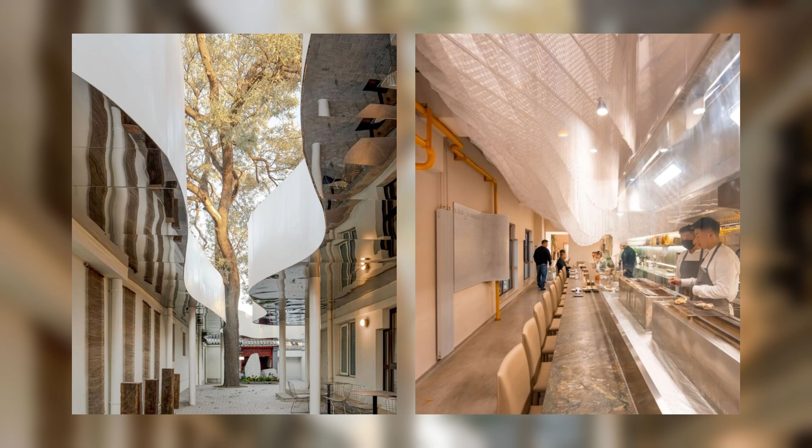In the 1990s, after multiple renovations and the expansion of roads, a smaller isolated irregular courtyard with a mix of old and new decorative styles that lacked unity or purpose, with only the shadows of its previous identity maintained in its spatial sequence. Consequently, just one block away is the central commercial area of Wangfujing, which is a major bustling hub of the city.

To tap into that energy from the new commercial area nearby while mediating its proximity to our historic center, we focused on the negative space within the courtyard instead of the building itself, and transformed the area into a more urban and public space, creating a natural gathering place within the courtyard.

The insertion of the cloudscape bridge reshapes the spatial order and changes people's preconceptions about how traditional courtyards can be repurposed. In the transformation of Courtyard 35, we aim to retain the essence of the courtyard, while redefining the flow of space and incorporating a variety of functional areas.

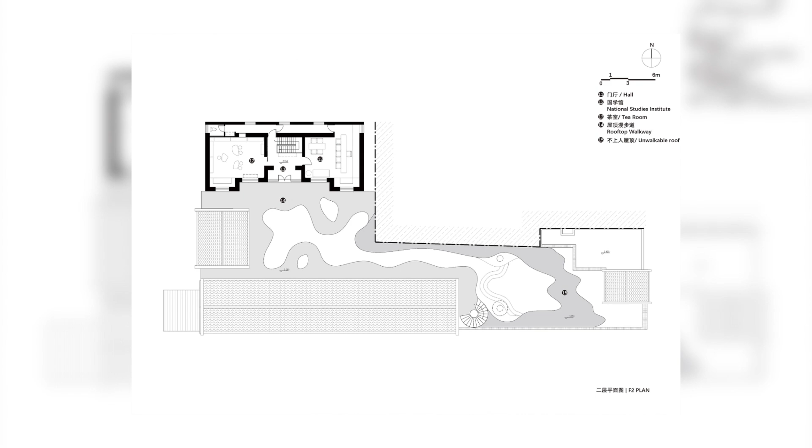The space transfigures from an originally introverted state into a small commercial complex accommodating modern functions and aesthetics. Cloudscape, art of the void in nature, man, man-made and man-made landscape.

To activate the public spaces deep within the city, the architectural renovation did not alter the original building. Instead, the cloud bridge was added to play with the void. The cloud bridge itself is an installation piece.

Not only is it a statement between new and old, but it is also a frame providing precious moments with nature in the urban landscape.

We have an innate fascination with curves. To a certain extent, we are also made of curves, and the organic shapes they create are what brings us closest to creating nature.

During the renovation process, Wei Studio redefined the skyline of the traditional ZeQun courtyards with a cloud bridge, forging a new relationship between natural and man-made spaces.

Upon entering, the first impression is of a cloud-shaped corridor floating within the courtyard, embracing two towering ancient trees. The cloud bridge is made of twisted mirror images floating above, abstracting the immediate surroundings and offering visitors an unexpected experience.

The bridge becomes an extension of the architecture, reorganizing the relationship between the building and the void, creating gray areas that alter the way the space is navigated.

As the major component of creating an ambience of otherworldliness, the cloud bridges give the sense of separating the ground and the clouds. Having a higher perspective of the courtyard is a new experience, and the peaking rooftops of the traditional courtyard house are almost like mountain peaks among the clouds.

The design integrates the old with the new, preserving the essence of the ZeQun courtyard, while introducing contemporary elements that enhance the interaction between the architecture and its users, the architecture and nature, the user and nature.

The cloud bridge not only redefines the architectural landscape but also serves as a medium for social interaction, bringing vitality and a new dimension to the traditional courtyard.